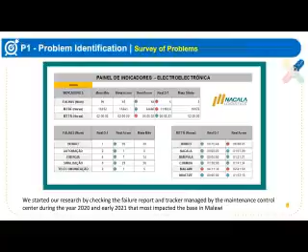VOC A5 was created on the 29th of January 2021 under the supervision of Rafael Geronimo of Electronica. As you can see in this slide on the survey of our problems from the CCM, we started our research by searching the failure report and tracker managed by the Maintenance Control Center during 2020 and early 2021 that mostly impacted the base in Malawi. We came up with 5 different projects in this year's CCQ.

The first one was the contamination basin and sensor to cut fuel from the generator's main tank to prevent leakage and soil contamination. The second one was to improve telecom signal quality by studying antenna changes. The third one was the adaptation of OBC rack port to prevent water and dust ingress. The fourth one was to make an automatic SMS system for the technical team simultaneously without signaling equipment failing or alarms. The last one was the exchange of current passage boxes for underground to avoid vandalism.

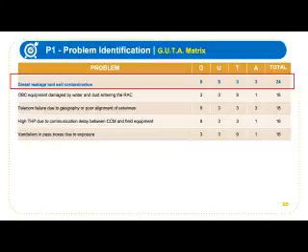As you can see in this G.U.T.A. matrix, of all 5 projects, the diesel leakage and soil contamination had a total of 24 votes or points, which made it the best option for this year's CCQ project. On phenomenon analysis, we are going to explain a little of what we call the 5W 1H.

These are the questions we need to ask ourselves: what, why, who, when and how. On what, we are referring to what is leaking - we would say oil and diesel, that's leaking in our generators. Why is it happening the way it is right now in our generators? That's lack of proper check in maintenance.

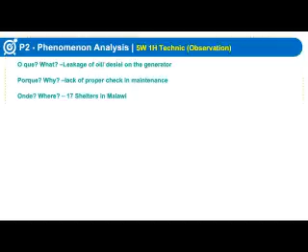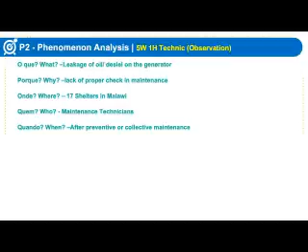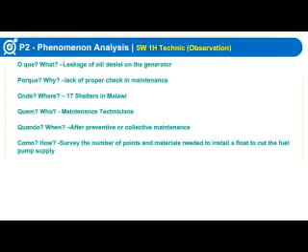We've got the question of where - it's 17 shelters in Malawi, along the railway. Who is responsible - that's maintenance technicians. When is the duration after preventive or corrective maintenance, the duration in between. How is the survey - we need to survey the number of points and materials needed to install a float to cut the fuel pump supply.

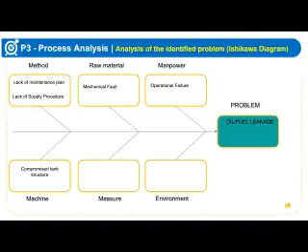In our next point, we are considering what we call process analysis. There are major points we need to consider: the method, the raw materials, the manpower, the machine, the measure, and the environment. All these are pointing to the problem of oil and fuel leakage.

On the method, we are saying maybe lack of maintenance plan, lack of supply procedures. On raw material, we are saying the mechanical fault, or maybe the way the equipment was designed, maybe it has some fuel flaws. On manpower, we are talking of the amount of people that are assigned to a particular problem - it might also have an impact.

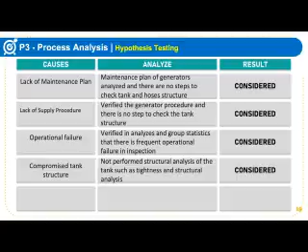As a group survey, we also managed on our own to check out the outcome of the survey, and I think the average was around 8.8, which I think was best for the whole team.